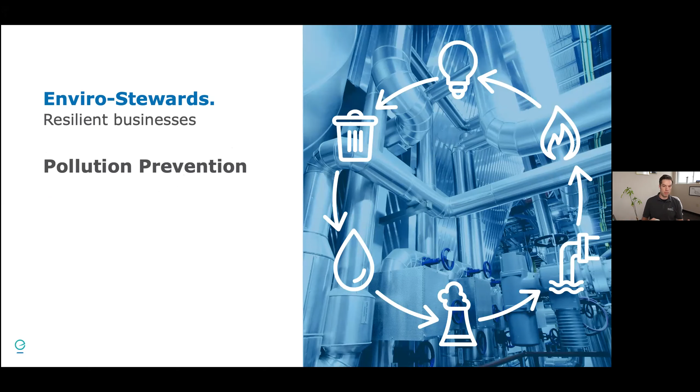When we first started out, we've been around since 2000, and we used the term pollution prevention quite widely at that time. It was just the era — pollution prevention was an emerging term in our industry. So we used that as a description of what our services are. As we'll see in the presentation, over the years our language has changed as things have changed in society and the way we talk about things. But that was our initial niche: pollution prevention.

Under that banner, we offer services from energy efficiency, toxic reduction, solid waste reduction, to net zero carbon, which is an emerging issue. A lot of our customers are wanting to get to net zero carbon, and we're helping along that path. So a lot of new terms since 2000 — it's moved on from pollution prevention to include a lot more of these, which we'll see shortly.

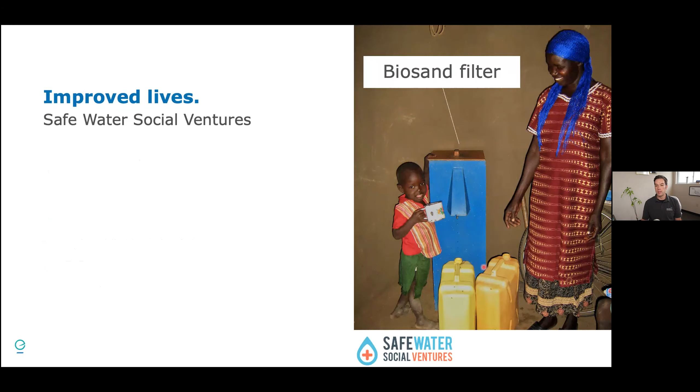The way that we improve lives is we help sponsor something called the Safe Water Social Ventures. This establishes locally owned and operated businesses in Uganda and East Africa that build and sell these biosand filters, this blue thing in the photo here. Bruce, who's the founder of Enviro Stewards and started Safe Water Social Ventures, gave a talk about this program. So later on, you're welcome to Google it on YouTube — if you search for Better Than Charity, you'll be able to find it.

Some of the things we're affiliated with that are important to us: we're a living wage employer in our region, and we're also a water efficient certified business by the region of Waterloo. We're part of the RSI, which is setting carbon targets for companies in Waterloo region, and we've so far exceeded those targets and are working to reduce it more.

We're also a certified B Corporation. In the States you might be more familiar with B Corporations, like Ben & Jerry's, Patagonia, there are a lot of big companies that are B Corporations. Essentially, using business as a force for good is their tagline, and we thought that was important for society, that everything's not about profit, but also about improving society and improving the environment and conserving it. So we became a certified B Corporation, one of the first in Canada actually, and the movement has grown since then.

We're also involved in the Sustainable Development Goals through the UN. We won an award partly based on our work with Safe Water Social Ventures. I bring these up because we like to walk the talk. We're an engineering firm, so we go into other facilities and tell them what we suggest they do, working with their team, but we also want to make sure that we're doing what we say as well. That's why we get involved in these sorts of things, and it's very important that we're affiliated with organizations like this.

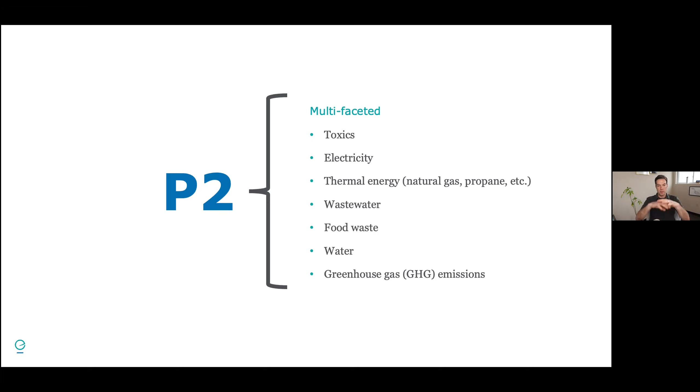Water conservation, and as I mentioned, greenhouse gas emissions, net zero carbon, those are all fair to say are under the P2 umbrella, as we've done work with people and started listening to what society is saying and what companies are asking for. This is the type of assessment we use, but I'd say it's all under the P2 umbrella. Similar to your group today, it's a wonderful example of this as well, where you have this ESP group working towards those goals, again under the banner of the pollution prevention approach.

The thing I really like about pollution prevention is that it addresses root causes. It doesn't just try to treat symptoms, it doesn't put a Band-Aid on things, it looks at the root cause and solves that. It's also a preventative approach, so preventing problems or waste before they happen. It's very repeatable, multifaceted across all those categories we looked at before, because it's a repeatable system you can apply in any facility, almost any company, and any media, whether it's water, energy, pollutants, etc.

It also forces systems thinking. By that, I mean looking at an entire system and how all the processes and components work together.

As an illustration of that, this is one we often use because we think it's a nice introduction to the P2 approach. This was a client that had some used solvent, and they had a vacuum still that would distill it. The solvent vapors would be condensed, go into a tank, and be reclaimed. Then they'd actually sell this reclaimed solvent for a profit. The still bottom, once everything's evaporated, would go to a still bottoms tank in this room, an open tank. And then they needed a fan to exhaust all the fumes.

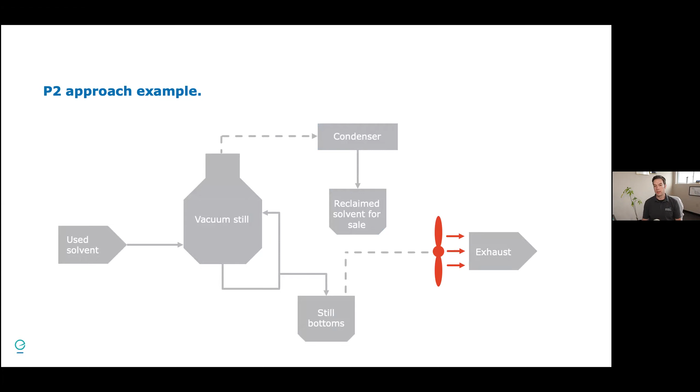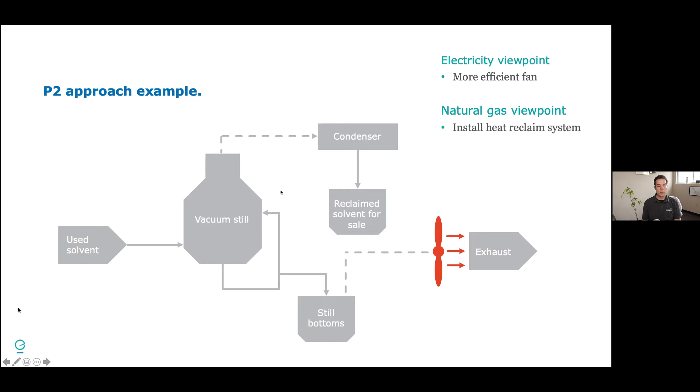If you're looking at this from an electricity viewpoint, just focusing on the fan, you might say, well, just put in a more efficient motor, like a variable frequency drive, which could save some energy. Or from a natural gas viewpoint, install a heat reclaim system—some sort of heat exchanger where you could capture the heat going out of the building and put it back in to reduce the heat that's lost.

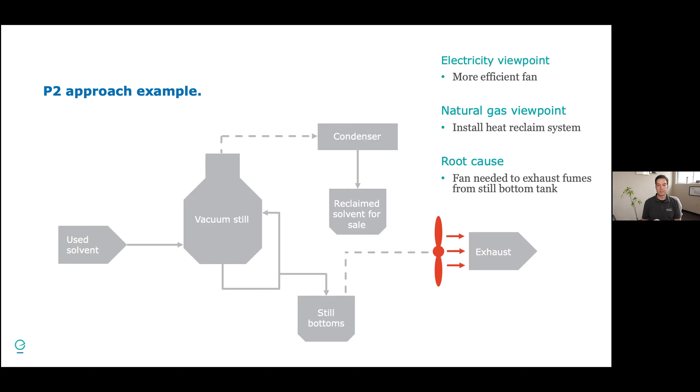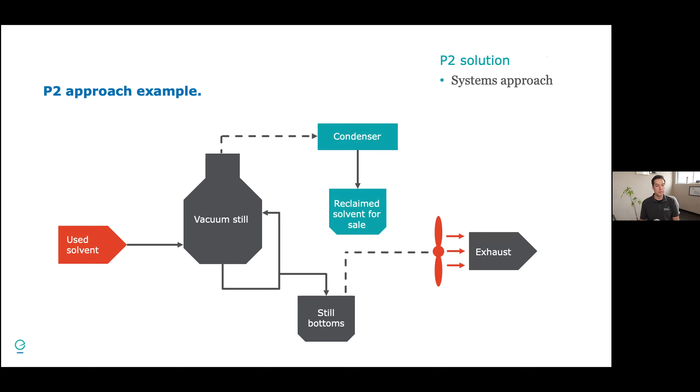But remember, the root cause was that this fan needed to exhaust fumes from the still bottom tank. So from a P2 solution approach, again, look at the entire system—don't just focus on the fan, but what's happening upstream of it as well. The best solution actually ended up being putting a lid on the still bottom tank and piping it up to the condenser, condensing it to sell with the other reclaimed solvent. That solved the exhaust problem because there was less air to move out, since the vapors weren't such an issue anymore.

At the beginning, you think, oh, just look at the motor, look at how you can reclaim heat. But I think it's a really interesting example of showing how when you look at the whole system, it gives you a better solution when you look at the root cause. The P2 approach is the ideal methodology for identifying these types of solutions.

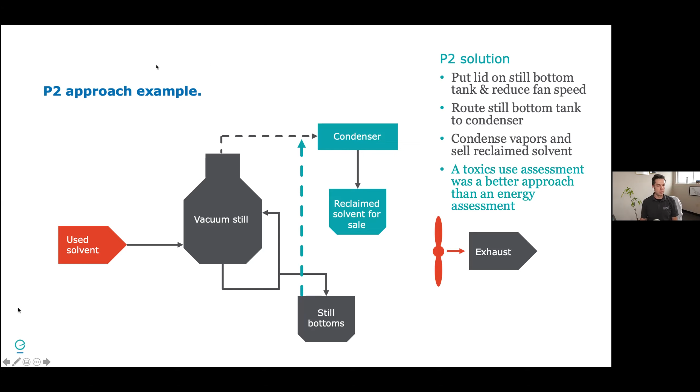I think also that P2 is a really emerging issue and something we should keep pushing in our respective spheres of influence. There are lots of global factors making it important. They're finite resources—every time we can waste less water, waste less energy, it conserves more for others. In Canada, and maybe in the States too, utility costs are increasing quite a bit, and it's becoming very expensive for manufacturers to operate in some areas because of electricity, water, and natural gas costs. If they can reduce those through a P2 approach, they can be more profitable.

As well, climate change is a big issue, with lots of opinions. One thing the P2 approach helps address is reducing environmental footprints. When we reduce pollutants and greenhouse gases, it doesn't just benefit us, but actually benefits everybody in the world, because climate change doesn't have boundaries—it affects everybody. Then there's stewardship and sustainability. These are terms companies are using more and more, and it's important to them. Again, P2 fits nicely into that as well.

Other factors include customer demand—customers are choosing who they buy from based on environmental policies. It's better PR for those companies as well. Nobody wants to be the next Exxon Valdez in the news; they want to be the good news story. Worker safety matters too—specifically related to toxics, if you're using fewer harmful chemicals, it's a safer environment for your employees.

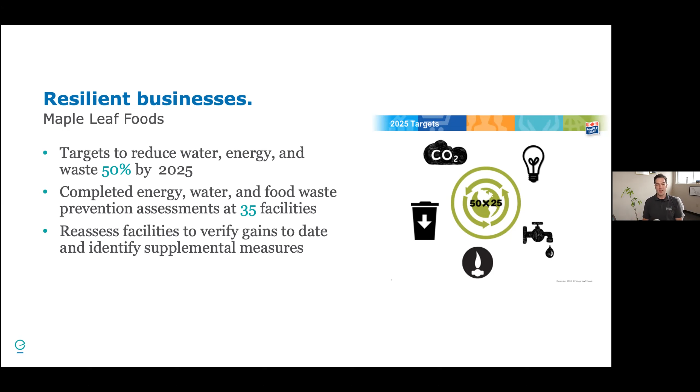Just an example quickly of the type of opportunities that we find. This one is from Maple Leaf Foods, just to give you a bit of a taste for what we're looking at. And then later on, we'll get into more specific examples and case studies.

So these three different pieces of equipment: this is a vacuum pump, and it needs water to create a liquid ring to keep the vacuum. This is a rotary screen, used in the wastewater system, and they use water to blast it off to clean it. And then this was for cooling—this tank is jacketed, so liquid goes in one of these pipes, goes through the jacket around the tank, cools it down, and then comes out and discharges out of the tank.

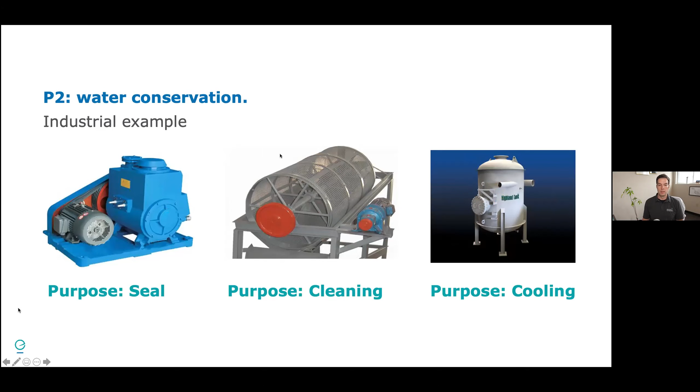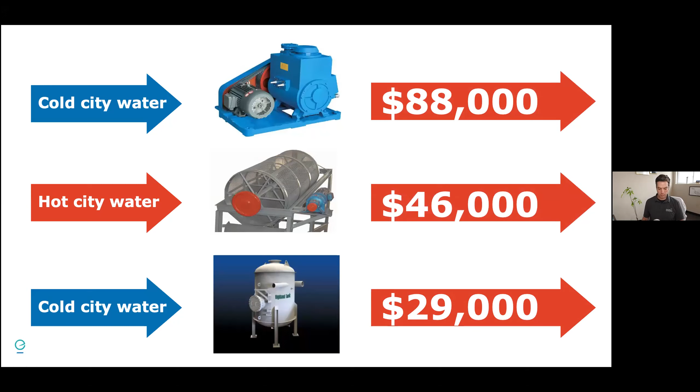So three different processes that were separate, using various types of water—some just cold city water, some hot water. We quantified how much it was costing for each of those streams of water for their respective purpose. In total, it was over $160,000 per year that they're spending just for the water use for these particular processes, including the heat involved if the water was hot.

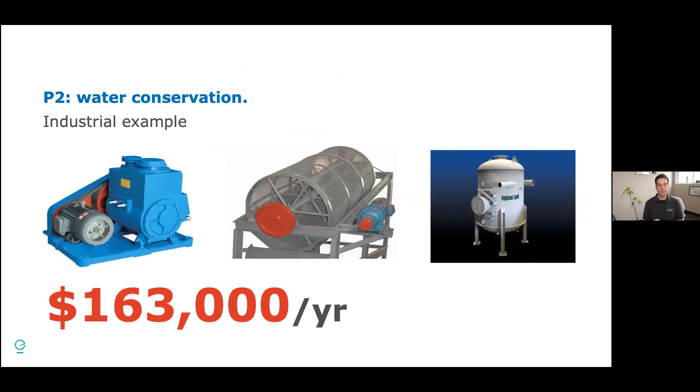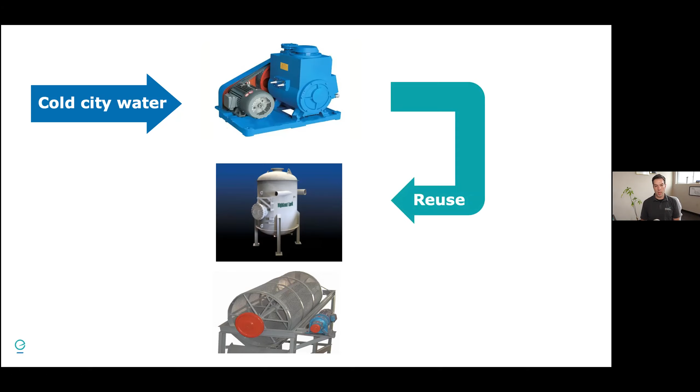The solution worked because these systems were fairly closely concentrated, geographically close together in the facility. Using a systems approach, looking at how everything works together instead of just focusing on the vacuum pump or the rotary screen, we saw that if you took the vacuum seal water from the vacuum pump, used that to cool your process tank, then reused that water again—and because you're spraying onto a wastewater stream, there's no risk of contamination since it just goes to the drain after that—by combining all those things, they're actually saving $110,000 per year by reusing that water as well as the heat associated with it.

That's just a good example of the types of things that we find when we do these types of assessments, again using a systems approach. And that one was specific to Maple Leaf Foods.

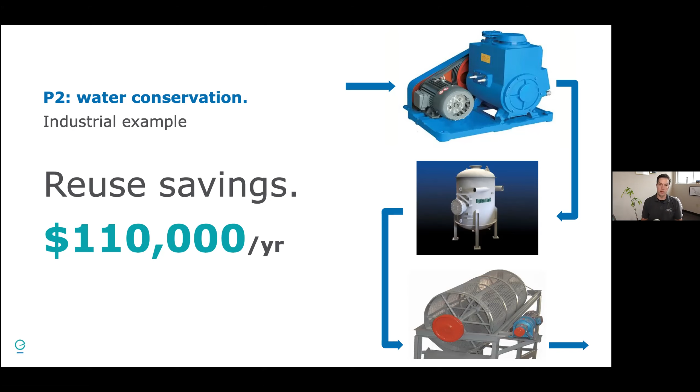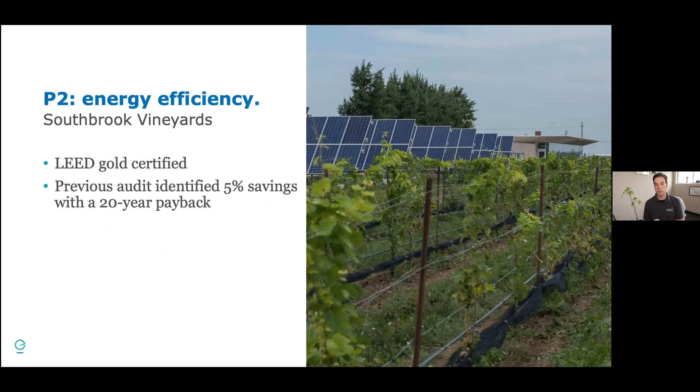Another one we really enjoyed talking about is Southbrook Vineyard, another food example. They had a LEED Gold certified building, so really energy efficient. They did have an audit conducted for energy and found about 5% savings, but with a very long payback of 20 years, which not a lot of people make the decision to go with.

So they could keep growing wine in those vineyards, and that saved about $20,000 per year because of the extra wine yield that would have been lost if they'd put solar panels there. So again, looking at everything all together, it even incorporated saving wine yield and energy assessment using a P2 methodology.

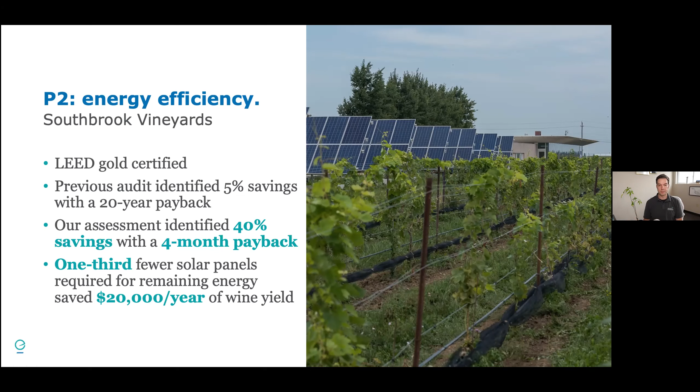I'll go through each of these in a bit more detail, because this is the systematic approach of P2 that I referred to before, and it can be applied in many different contexts, whether automotive, food, chemicals, or pharmaceutical. It's the methodology that's key, not necessarily what industry you're in or what your product is.

For us, we always emphasize that getting an internal team together is a key foundation to a successful P2 project. A multidisciplinary team, with people from engineering and management there, so people see that management is committed. Maintenance, operations, quality assurance, quality control, purchasing—anybody you think will have a say in any change that's made, it's good to invite them to the meeting.

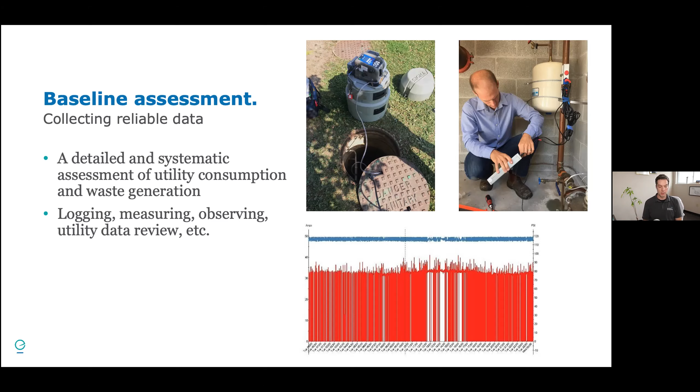For us, it's really important that we log things. It adds more time and scope to projects, but we always push to make sure we can install meters and get your equipment logged. Similarly, it might be something you want to do internally as well, and later on I'll show you a few tools we rely on that you may want to look into for your own internal assessments.

This is an example of a customer we were talking to who had this ventilation hood. When it's on, it sucks air and blows it out of the building, so all the heating or cooling in that room is exhausted whenever that thing is running.

We wanted to log it using an amp logger, just clamping it on one of the phases. The last person who leaves at the end of the day turns the hood off, and the first person in the morning turns it back on—okay, fair enough. And we still decided to log it.

Lo and behold, what was revealed only through logging is that the cleaning staff were turning the hood on when they came in, thinking they had to, but they actually didn't need to. Someone had just told them at some point to turn the hood on when they come in and off when they leave, and the people leaving and coming in weren't aware of what the cleaning staff were doing. So essentially: cleaning staff, leave the ventilation alone—you do not need to turn it on during your evening cleaning.

A simple example, but it emphasizes the importance of logging things and not just relying on anecdotes or people's experience to know what's actually going on in your facility. The numbers don't lie, so to speak. Once you've collected all that data, you want to prioritize it.

So we use something called the Pareto principle. You may be familiar with that. Essentially, it's the 80-20 rule. And it looks like this in graphical form.

So later on, when you've done your first assessment and addressed processes A and B, then you can start coming down and addressing these others. But it's important to prioritize what you want to look at and go for those bigger gains first.

So after that, as the example I showed before, you want to be able to quantify what the potential savings are. So you've found what the consumption is, you've done a Pareto analysis. Okay, process A and B is what we want to focus on, or in this example these three processes. Then you can start playing with ideas about what we can do differently to reduce the water consumption, reduce the toxics use, whatever it is, and what are the potential savings if we do that.

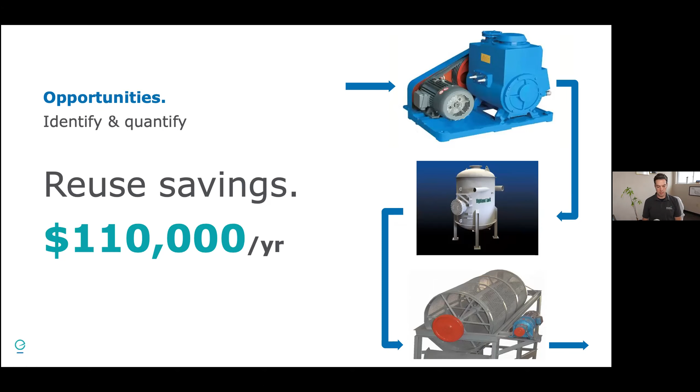So your team comes up with a roster of ideas, of initial savings ideas and quantifications—how much you think you're going to save.

And then another important step that we do, and we'd recommend for your facilities as well, is to get that team back together and just review what's been found so far. Typically that group will be the same as the group at the kickoff meeting. And you'll look at the opportunities that you found and also the initial data you found.

It's like, hey, here's what we measured. Does this make sense that process A is using this much of this substance? And then you can sort of validate your background data. That serves as the foundation for your further decisions, and then vet the opportunities.

So, hey, here's this idea to reuse water through these three different systems. Technically, does this make sense? And then you get agreement. Yeah, that makes sense. Well, that might work this way. And someone else might have another suggestion of how to do it differently and still get the same result.

And that's fine. People might bring up their own ideas and you might need to tweak your own ideas. But the idea is, again, this is a way to get buy-in for those opportunities. So now everybody's agreed. Yes, technically these make sense.

The data looks good. But then more importantly for perhaps upper management is what's the business case? We all work for businesses and business has to make a profit to survive. That's just the nature of the beast. And so preparing a business case for the opportunity is extremely important.

Sometimes companies will do things because it's the right thing to do environmentally or for worker safety. But the bottom line in monetary terms is very important for making good business decisions.

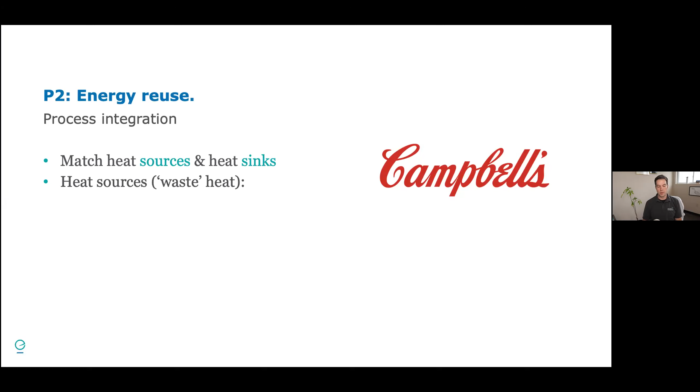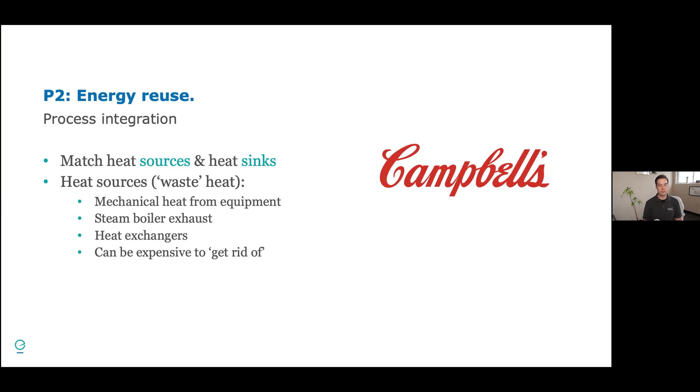A heat source, another term for it, is waste heat. This could be mechanical heat from equipment—as equipment runs, there's friction, there's noise, and it can generate heat. Your steam boiler exhaust carries a lot of heat out of your facility. There might be all sorts of heat exchangers. And this heat can be very expensive to get rid of.

So a very common industrial process is a cooling tower on your roof where you're getting rid of excess heat from your facility. You're essentially evaporating water, which reduces the temperature of the water that goes back in to cool the system, and it's this constant loop. But you're losing water each time you evaporate it, and you're running the motors to spin the fans inside the cooling tower as well. So it's very expensive to operate.

Heat sinks are things like building heating—you always may need to heat your building for your staff or a certain room, so that's where you want to sink some heat. You could also preheat your boiler makeup water: instead of heating water from a very cold temperature that comes in from your city line, you preheat that, so you're starting from a higher temperature and will use less natural gas to heat it up in your boiler. Or you might have a product or some process water that needs to be heated, and you can use that heat to preheat it as well.

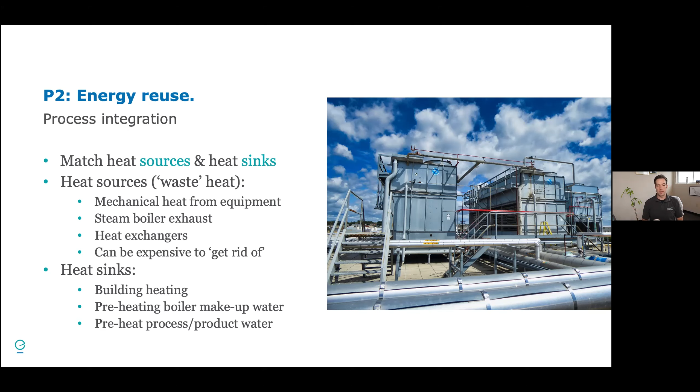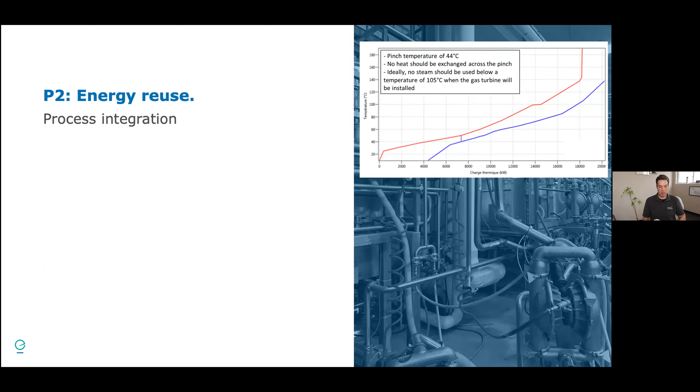So after going through this process at Campbell's, there were some very significant energy, natural gas, and water savings—over $1.6 million per year in savings with just a 2-year payback. That's the value of doing that type of detailed assessment using process integration. But again, the approach was the same as I described: a kickoff meeting, an action plan, doing a detailed assessment, and looking at how all the systems work together.

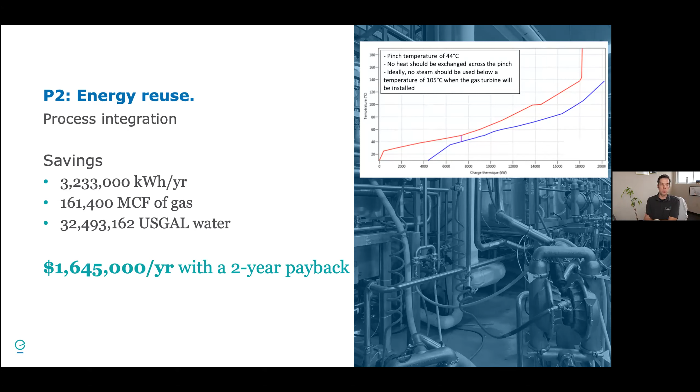Also at Campbell's—I mentioned food loss and waste prevention before, and this is a really emerging area. I know a lot of people on the call might not be in the food industry, but like I said, it can relate to anything else you're looking at. The approach is similar, but they had this optical sorter that was sorting carrots.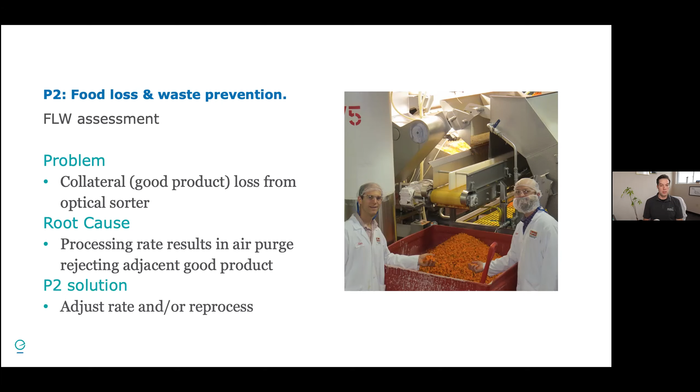So the P2 solution was just to adjust the rate of the optical sorter, slowing it down so it has more time to make sure it's only hitting the bad product and getting rid of that. They also reprocess the carrots—some good ones that come out get put back in with the next batch and reprocessed, and hopefully they'll make it through. This resulted in over $225,000 per year in savings just from a simple adjustment to an optical sorter.

Another case study we'll look at is S&C Electric. They had some bylaw compliance issues—out of compliance for effluent, and the non-compliance was sporadic. They were getting these blips in their wastewater treatment system. Here they're standing in front of part of their treatment system.

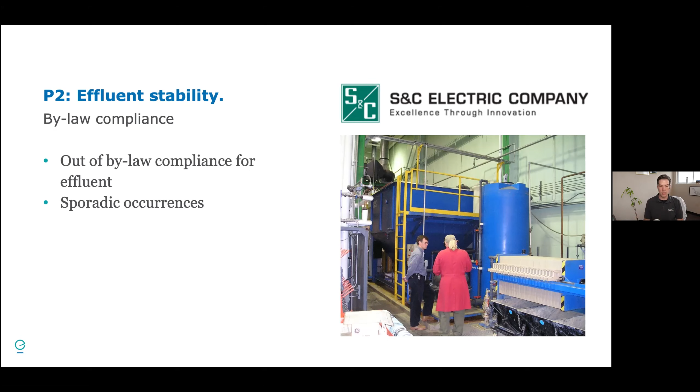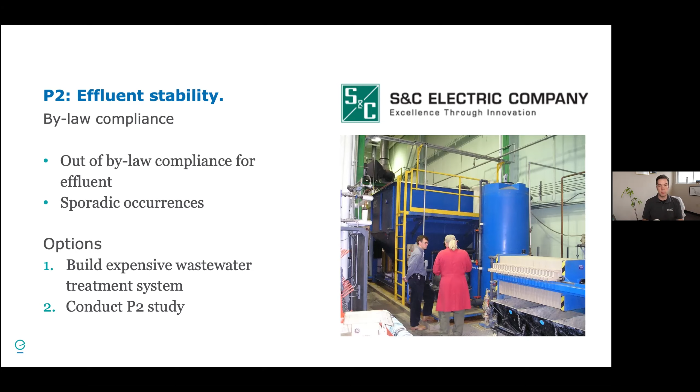They wanted to figure out what they needed to do to deal with the extra loading on their system. Did they need to build more wastewater treatment, expand capacity, or add a new process? So option 1 was build more treatment, or option 2, conduct a P2 study. When we met with them, we described the P2 approach, and they agreed to that instead of jumping right to building a more expensive wastewater treatment system. What we found was that chemicals in tanks were overflowing to the sewer.

This was going into their wastewater treatment system before being discharged to the municipal sanitary system. This is a photo of what the tank looked like, and it would overflow to the sewer.

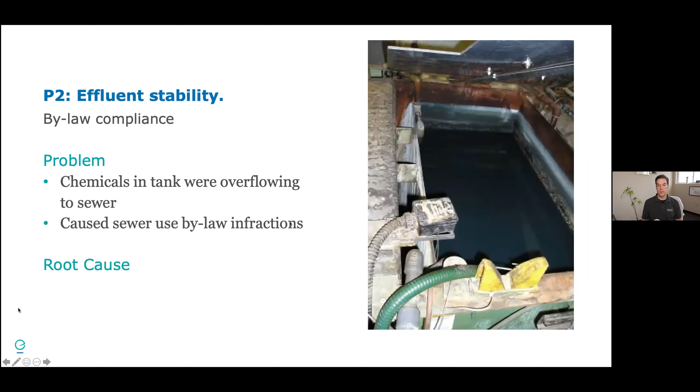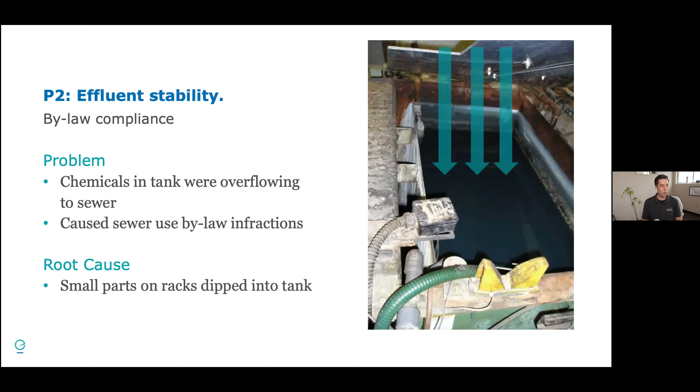What was happening was that small parts throughout the day were being dipped into the tank—no problem at all, they'd go in the tank, go back on the rack, move to the next one, dip in the tank again. Sort of an index system—I don't know if you have one of those at your facility. Occasionally they'd have larger parts, I think in barrels, that were also dipped into the tank.

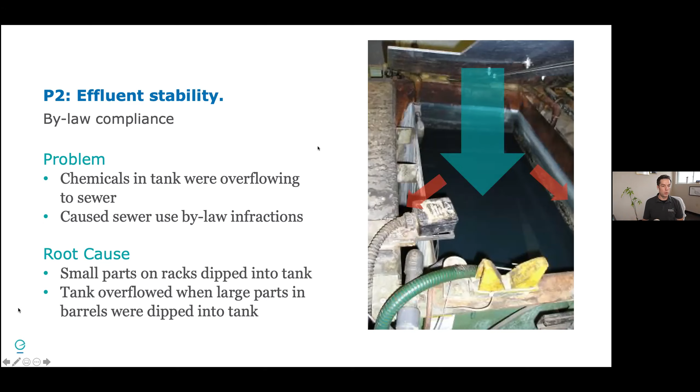These much larger items were displacing the chemicals in the tank, causing it to overflow. Hopefully you can see the red arrows there pointing to the outside tank, and those chemicals were going to the drain and into their wastewater treatment system.

The pollution prevention solution was to just plug this outer drain where it was going to the treatment system, install some small pumps, and pump it right back into the tank.

As a result, they had no more bylaw violations. They had economic savings because they could reuse their chemicals, and they didn't need to modify their wastewater treatment system since this solved their problem. Taking a P2 approach was more environmentally beneficial—there weren't chemicals going to the environment, there were economic savings, and they didn't have to build more treatment.

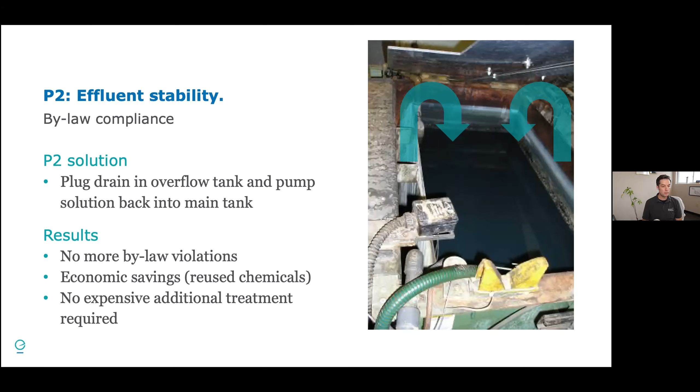TREMEC is another example. Some new municipal, provincial, and federal regulations came out over the years, and a particular one included methylene chloride, with very strict guidelines on the concentrations you could discharge to air, sewer, or the environment in general.

What TREMEC did was essentially clean out paint totes from automotive companies. Companies would send them their empty paint totes, which of course were coated with paint inside. TREMEC would refurbish these using methylene chloride to clean them.

So what do you do? They now had this methylene chloride to deal with because of new legislation—they could face heavy fines or even be forced to shut down if they couldn't comply. Similar to S&C, there were two options: build a treatment system to deal with methylene chloride, or conduct a P2 study.

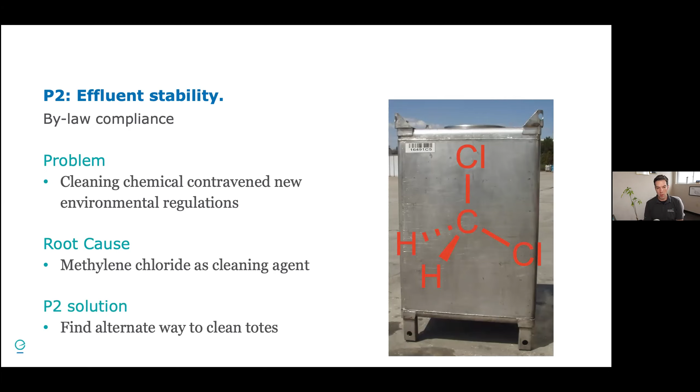Wisely, they chose the P2 approach. The problem was the cleaning chemical contravening new environmental regulations, and the root cause was their use of methylene chloride as the main cleaning agent. The P2 solution was to find another way to clean the totes using less methylene chloride, no methylene chloride, or substituting it with something else.

We did some research, and this photo shows what the solution was—I'll let you try to guess what he's using there while I take a sip of water.

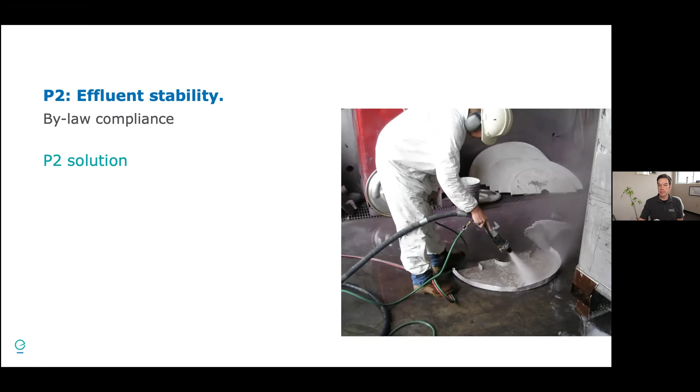The system he's using is actually baking soda and compressed air, shot out of this pipe, becoming an abrasive that erodes the paint from the containers. They did trials because they were unsure, and it actually cleaned better than the methylene chloride did. As a result, by switching to compressed air and baking soda, they achieved a 99% reduction in their methylene chloride use.

Now, initially, another hesitation they had was that it was more expensive than methylene chloride. This type of system is not cheap. Plus, you need compressed air, which is expensive to make, and the consumables of the system.

However, in the long term, we were able to demonstrate that it's less expensive because there'd be no surcharge violation fines, no fees or annual reporting requirements. Under these government legislations, you have to prepare annual reports, hire a consultant like us to do a report and submit it to the government for approval. So they didn't have to pay those fees anymore.

And of course, less treatment was required. For workers, methylene chloride is a pretty nasty chemical, and they didn't have to handle it anymore. So this system, although noisy, was a lot safer and it was non-toxic.

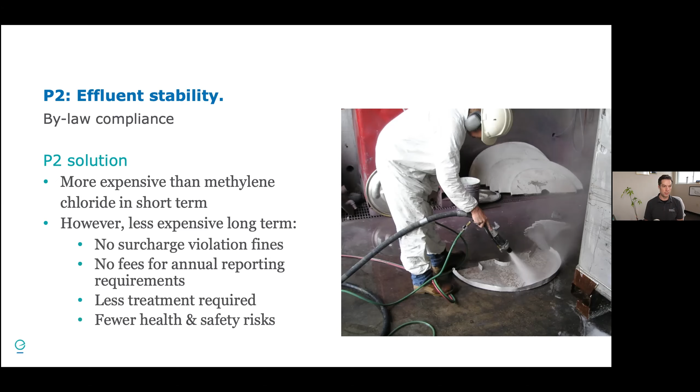Now, they still needed to treat some of their effluent, but it was only 1% of what they would have had to treat if they were still using methylene chloride for everything. And they ended up winning a national award for this project. So it's an interesting story where compliance violations actually led to a national award, a very different outcome from what they had started with. It's all thanks to taking a step back, looking at the entire process, and coming up with a better way using a P2 approach to solve the same problem.

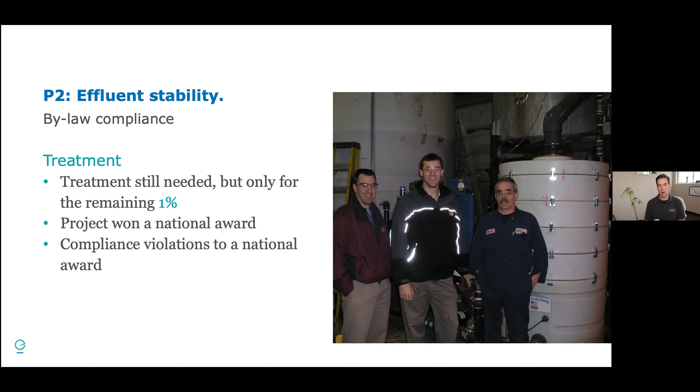Prokleen is a washing company. They clean bulk liquid containers, like these 7,000 gallon cargo tanks you see going down the highway delivering all sorts of liquid products. They clean about 13,000 containers per year and have 2 facilities. This is John Corrigan, who was the owner, and this is what the facility looked like, with these big cleaning bays where the trucks would come into.

Now these containers could have food, so syrup, flour, chocolate, barley, all sorts of things like that, oils, or chemicals. They could be hauling asphalt, soaps, any other type of chemical product you can imagine.

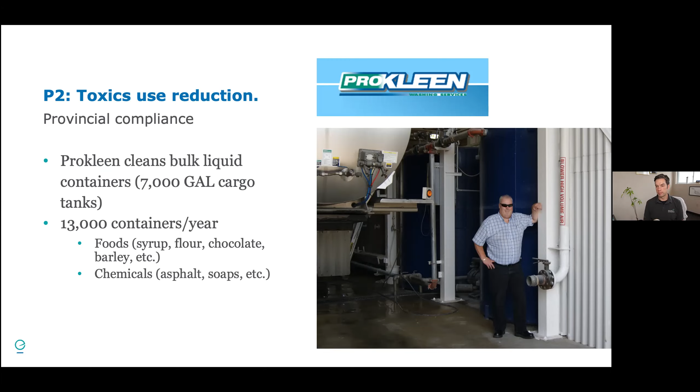The problem for Prokleen was the residual heel, as they called it. It's the remaining product left in the tanks. These tankers go to their destination, unload their flour, unload their oil, or whatever it is, but there's always a little bit remaining at the bottom. Those trucks would go to Prokleen, and Prokleen would clean them out for the next service.

Another problem was the wastewater from cleaning. If all those chemicals go to the drain, that can create issues of bylaw compliance and just putting nasty chemicals into the environment. So what was happening was, say this chemical truck would come into the facility with some heel left over, residual product.

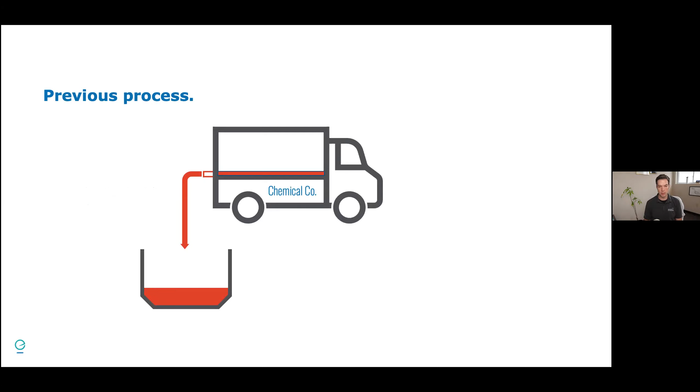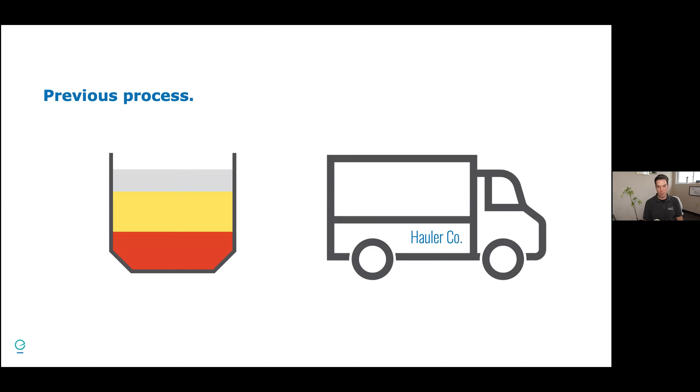Prokleen would need to drain that out before they could properly clean the truck. The next truck comes in containing a different product, and they would again dump it into the tank. Prokleen would clean it, so eventually you get this situation where you have a tank full of different chemicals and all sorts of things mixed together. Then they would pay a hauler to come take it away because they couldn't put it down the drain. A lot of it was not treatable, and it was very expensive to pay a licensed hazardous waste hauler to come take that waste away.

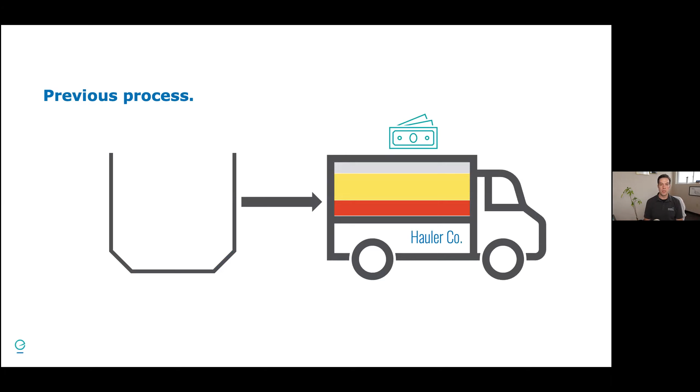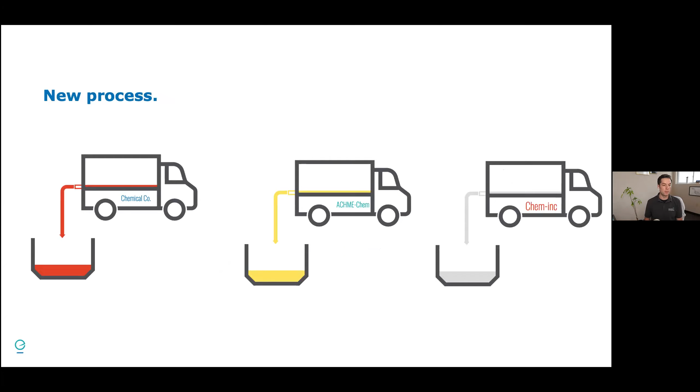So essentially, a new process was: why don't you put chemical A into the chemical A tank, chemical B into the chemical B tank, et cetera. Segregate them and divert them instead of mixing them all together.

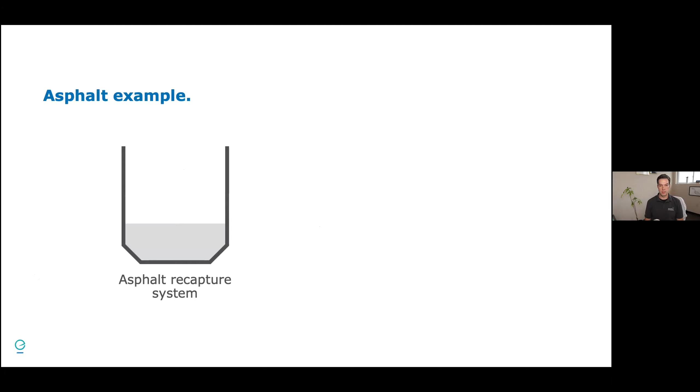An example of that was with asphalt. They installed an asphalt recapture system, so every truck with asphalt would dump all the heels into the same tank. Then the asphalt supplier would actually buy back that asphalt from them because they could reprocess it. It cost them about $2,500 to implement the system, I think it was just a spare tank they had. But it saved them over $11,000 per year by sending this asphalt back to the supplier, getting revenue instead of dealing with it on site or paying someone to haul it off as hazardous waste.

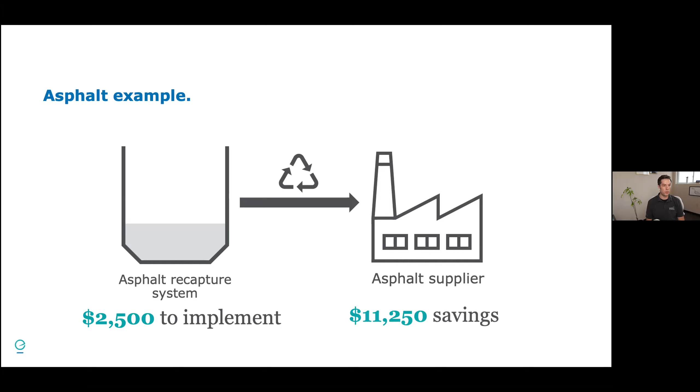So just the toxics reduction savings alone were over $4,000 in the first year with a 1-month payback. $4,000 isn't a lot of money, but a 1-month payback, that's pretty quick. And still, $4,000 is money in the bank for a company like Prokleen.

We included other things in the assessment, not just looking at toxics. We also looked at water conservation and looking at all these things together. The total savings were over $500,000 per year with a 5-month payback. So again, using this P2 approach helps you identify really strong opportunities for reduction.

Then food was also a problem. Surprisingly, you think, well, what's wrong with food? Can't you just put it down the drain? But it's expensive for bylaw compliance because sugars are very high in BOD, biochemical oxygen demand. So it's very expensive to pay a surcharge to the municipality to dump that down the sewer.

Actually, Prokleen was paying about $18,000 per month to put their food down the sewer for the municipal wastewater treatment system to deal with it. It's very expensive to treat on site. And is there a better use for that food?

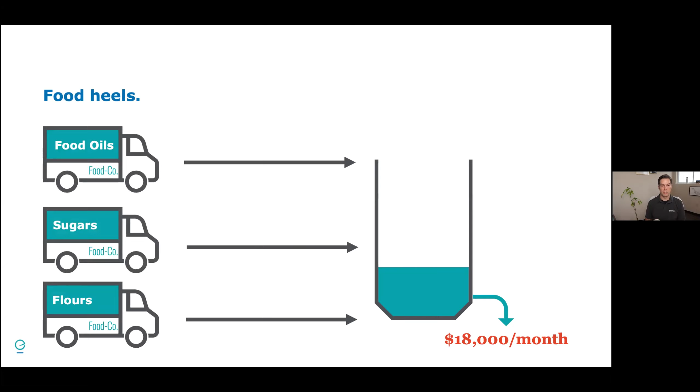Similar to the example before with chemicals, instead of mixing all these food heels into one common tank and dealing with this big tank of food waste, which just cost them $18,000 a month by discharging it to the sewer, find another use for it. Maybe a fertilizer factory will take some food type to blend into their fertilizers, or a pig farmer might take your chocolate waste or sugar waste and feed it to his pigs, giving you a small amount for that food. So diverting the food waste from the sewers by sending it back to factories or finding alternate uses for it was a way to reduce their sewer surcharge.

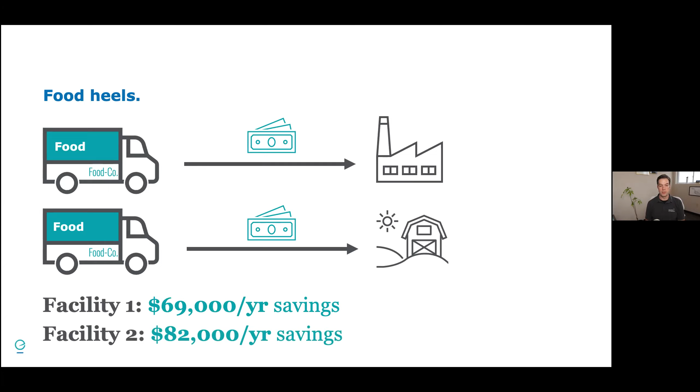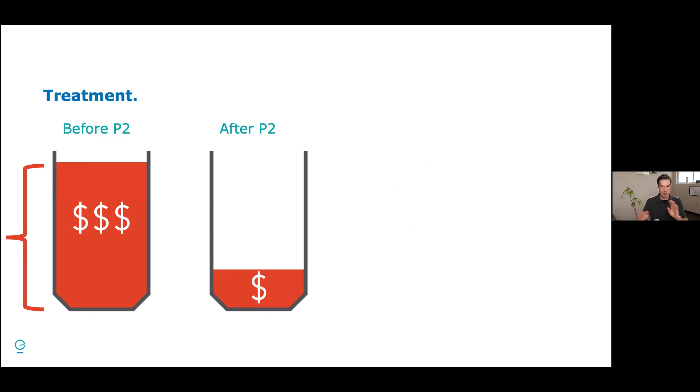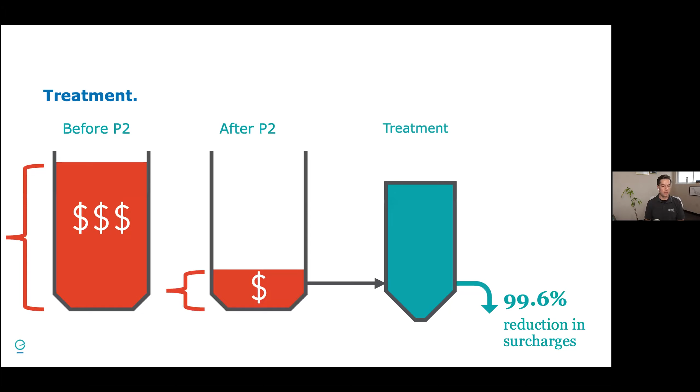As I mentioned, there are two Prokleen facilities. The first saved about $69,000 a year, and facility 2 saved $82,000 just on these types of food opportunities alone. They still needed treatment for what was residual, but before P2 they would have been dealing with very expensive, large volumes of wastewater. After P2, diverting the chemicals and the food as much as possible, there was much less to deal with, and they could install treatment. There's actually a 99.6% reduction in their surcharges because they're able to deal with it well.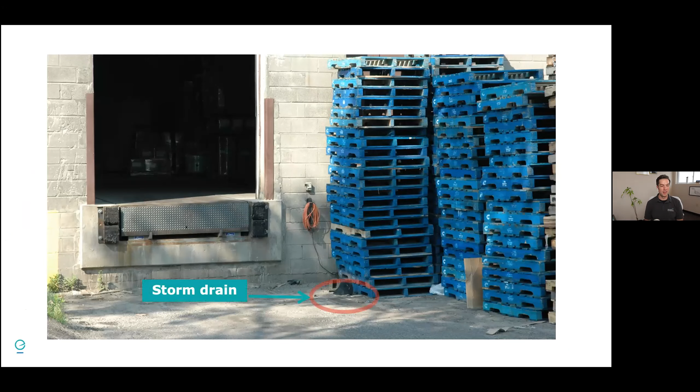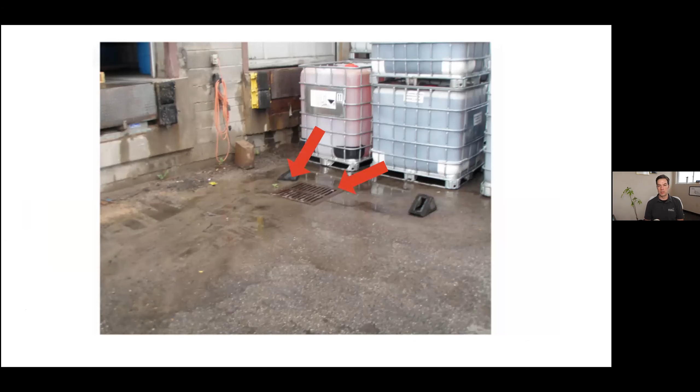The last example in this section is something you might have at your facility when you get bulk chemical deliveries. There's a common situation where you have a ramp at the bottom, and I don't know why they put storm drains there. If something spills, it's going to go straight to the storm drain by gravity. They're storing liquid totes, and if a truck backs into those, or a tote fails, or a valve fails, it goes right down the storm sewer to the environment.

This is an illustration of what's going on there. It's on a ramp, so gravity is working against you. A tote goes inside the facility, right down the sewer. Your truck empties, goes right down the sewer. It can be a disaster for the environment, with very heavy fines.

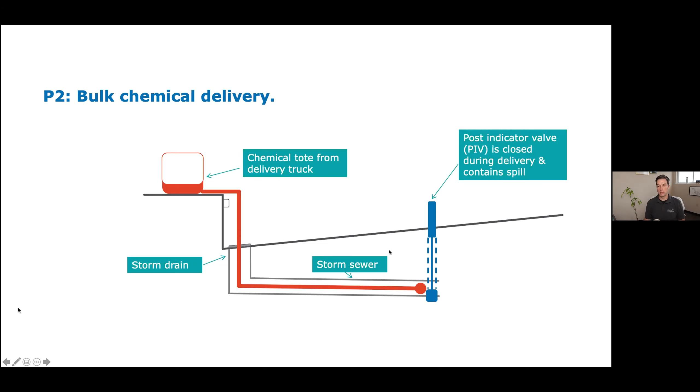So the solution was we installed a post indicator valve. During normal operations, the valve would be open, allowing rainwater to keep going through the storm sewer as designed. When a truck came, they would close it, capturing or preventing any spills from getting to the sewer. There's a valve on top; this handle comes off, they turn it, and it shows closed. When the truck delivery is done, they take that same valve and put it back to open.

So let's take a step back. One question might be, well, those solutions seem pretty easy, don't they? Aren't they obvious? I think it helps to put yourself in the person's shoes, and you in the audience would be very familiar with this because it might be your role. Take three different people, for example, with different things on their minds: the CEO thinking about profit and shareholders, QA/QC thinking about new processes and validating a new process for a client, and the plant manager dealing with equipment breakdown, safety audits, and staff turnover.

That's a real occurring thing for us. We find that you go one day and you're dealing with one plant manager, you go back a week later and there's turnover, there's somebody new.

So these people are dealing with product out the door, dealing with customers and shareholders. They just don't have a lot of time to figure out how much is it costing us, how much are we losing, where's it coming from, how are we going to address the issue, how are the expenses going to be, et cetera.

So that's where you, as the P2 hero, can take this on and bring them the answers that they need, and make the business case for them to implement these solutions. In our experience, that's why what seemed like obvious solutions aren't being implemented, because there's no P2 champion whose time is dedicated to looking at these things, since everybody's so busy getting product out the door and satisfying customers.

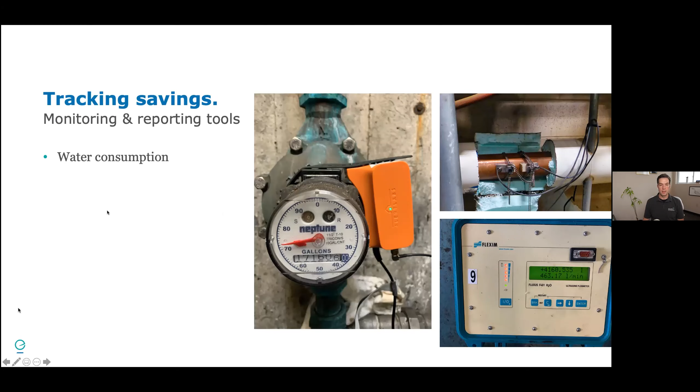And finally, tracking results. Here's some tools you may want to look into. This one is for tracking water consumption - you strap it onto your meter and it reads the pulse and tracks water consumption. This is an ultrasonic flow meter, which has sensors you clamp onto a pipe, and a logger that reads and records the flow. The value of this type of thing is we're currently monitoring for a customer.

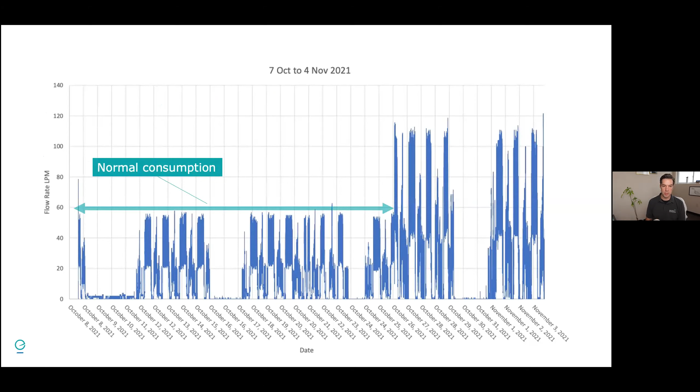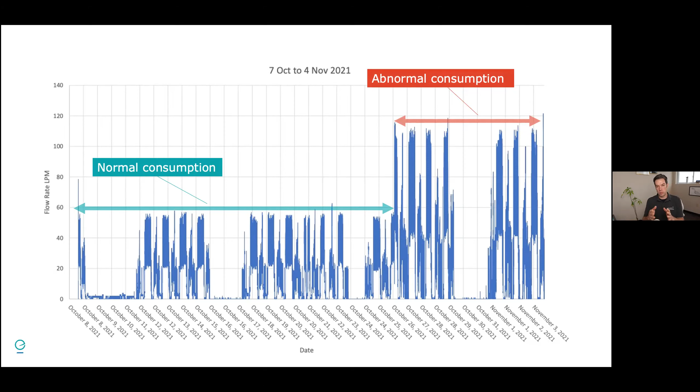We have a contract to do real-time water monitoring for them. In the data in our monthly report, our employee found that this was the normal consumption of the facility, then all of a sudden there's this abnormal consumption - almost twice as much as what was normal. This would not have been seen if they weren't tracking and measuring their water use.

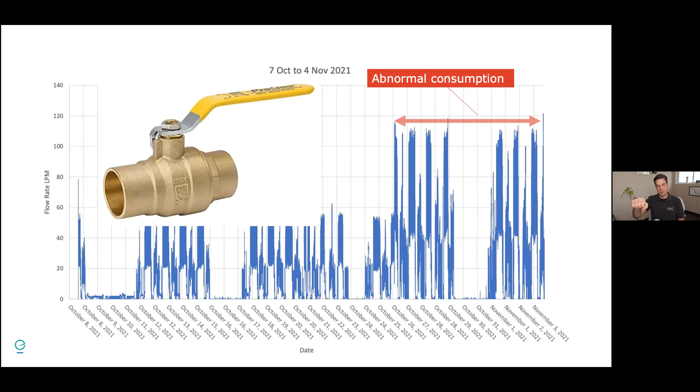As it turned out, somehow a ball valve was adjusted. I'm sure you've all seen ball valves before - this is what one looks like, but the amount you open it has a very different effect on the flow that goes through it, so you just nudge it a bit and you get way more flow through it. They figured out that's what was going on, adjusted the ball valve, and they're back to normal consumption.

And then finally, as another example, for thermal energy, measuring temperature is a great way to figure out what's going on. The process integration study is a really good tool to figure out the temperatures coming out of heat exchangers - what's the temperature going in, what's the temperature coming out, what's our wastewater temperature, are we losing heat through our wastewater? Heat sink and source matching can be used by looking at the temperature differentials, and you can get into fairly complex calculations for BTUs based on temperature and the type of substance. It gets into detailed geeky stuff, but temperature is a very valuable thing to monitor as well.

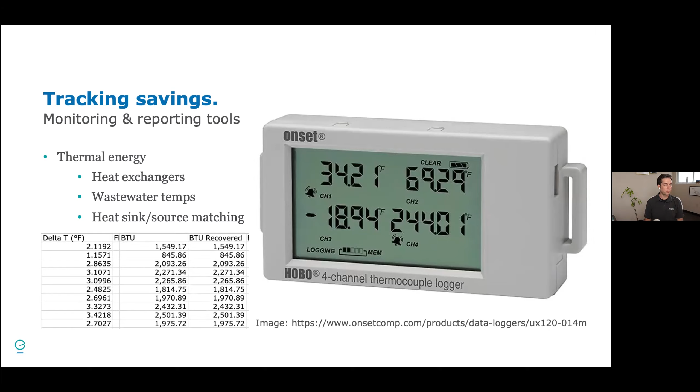So those are the types of tools we rely on for tracking savings and also identifying additional savings. Just to wrap it all up.

Overall, pollution prevention is a systematic approach, which is why it's so powerful, as we saw in those case studies, for your facility or for any type of industry. It addresses root causes - it doesn't just deal with problems or clean up waste, it prevents that waste from happening in the first place. You take a multimedia approach - pollution prevention, people sometimes only think of toxic substances, pollutants, or chemicals, but actually it's a wide umbrella, and as we've seen, it can include water, energy, and even food waste.

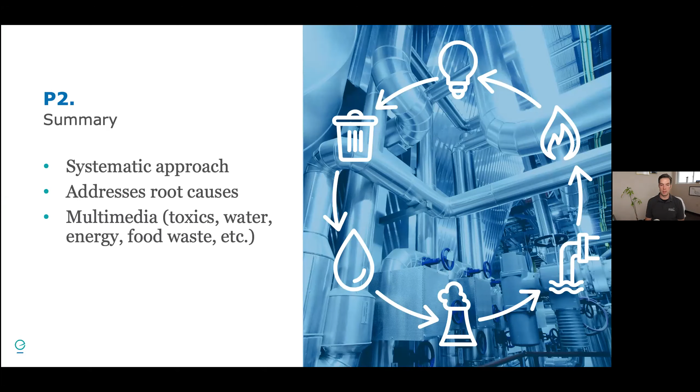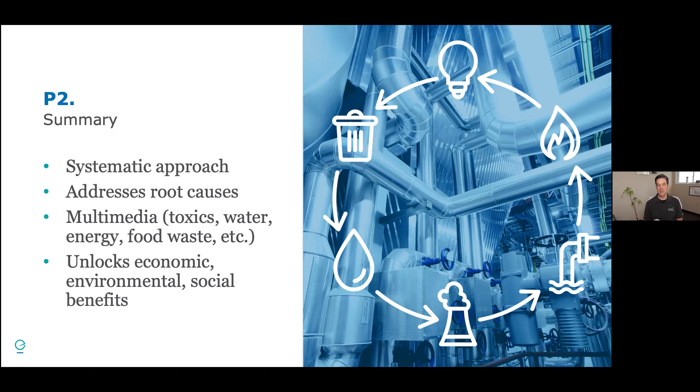By following the approach, it has environmental savings, but it can also unlock economic savings. As we saw in a lot of those examples, there's significant savings for companies, and social benefits too - less hazardous chemicals for your workers to deal with, a cleaner environment for the neighbors around your facility, because you're not putting out as much wastewater or strong effluent, or using as much of the water resources in your community. So we went through a lot of content there - I'm surprised I made the timing okay, and I hope it wasn't too fast and made sense.

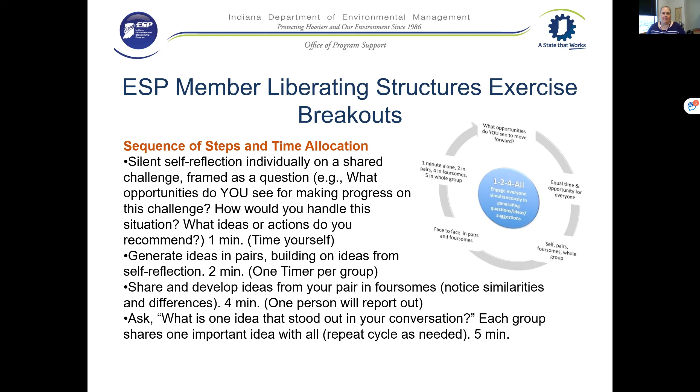Welcome back, everybody. Sorry for the confusion. There were a few folks that didn't join in our exercise, so I had to move folks around. Hopefully you had a good opportunity to speak to one another.

We did. Good. And now is our opportunity to hear from each group what you learned or what your takeaways are. Since I wasn't in each group with the spokesperson, for the first group, go ahead and report out.

Who would the first group be? Because I'm on the phone, I don't have slides or video. Oh, okay, let me see if I can pull that back up. I'm not sure that I can see the breakout rooms.